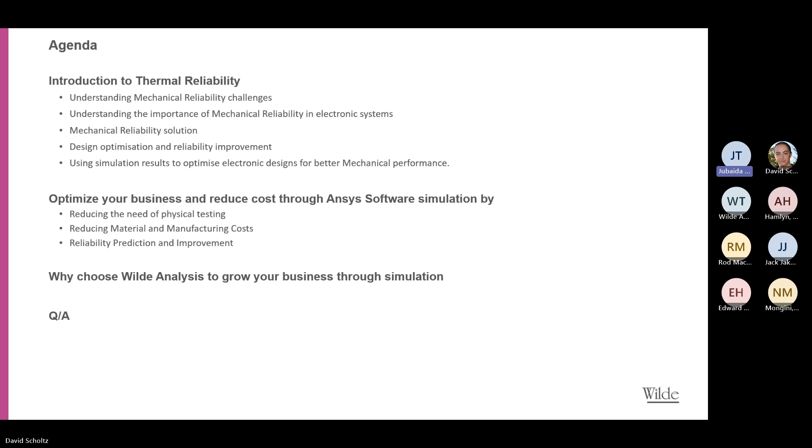So today's agenda for this webinar is to understand how you can improve your mechanical reliability, understanding your reliability challenges, mechanical reliability in your electronic system, how you can optimize your business by reducing cost through reducing the need of physical testing, reducing material and manufacturing cost, and also how reliability can predict and improve your product lifecycle.

Electronic systems are found in nearly all industries, everything from aerospace, automotive to consumer electronics and healthcare. To ensure these systems remain operational and perform their intended functions in a variety of environments is critical to product success and customer satisfaction. Companies who properly address electronic reliability concerns through simulation can meet many of the objectives stated here.

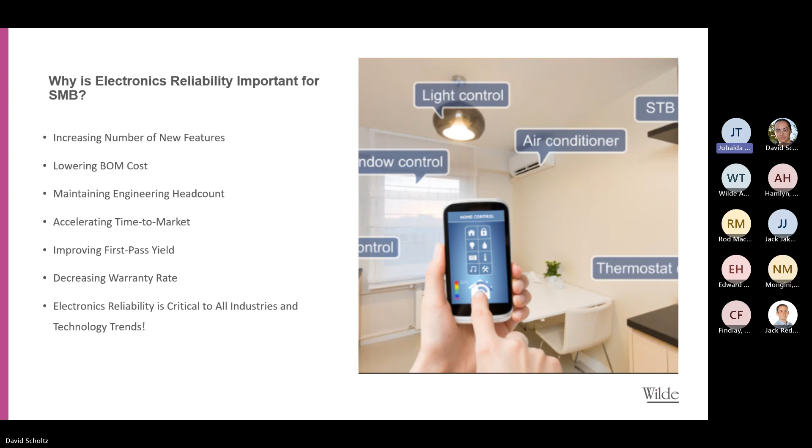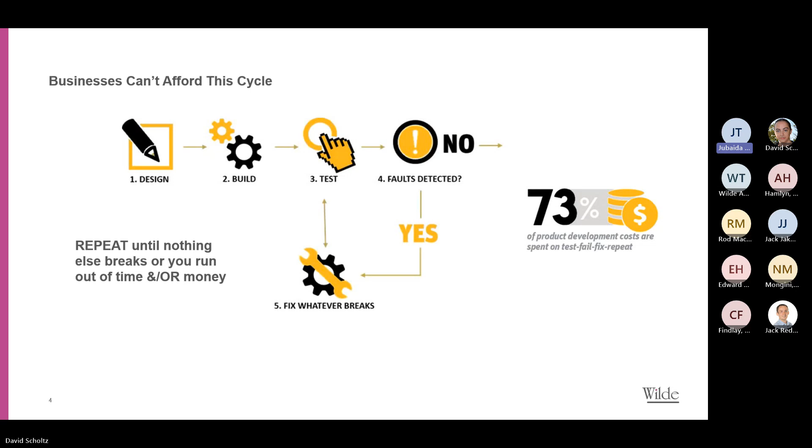Traditionally, companies have used a design, build, test, then break and fix approach in the design cycle. This process can be very expensive and time consuming. The design rules and best practices associated with this process may not provide engineers with enough guidance to properly design modern cutting edge products.

By using simulation, virtual prototypes can be created, tested virtually, and provide engineers with a higher degree of confidence that the eventual physical testing they do run will be successful.

Performance, safety, and cost are critical considerations in the design of electronic systems. Designs are required to reliably perform their intended functions in a wide variety of demanding environments. If an electronic system gets too hot or has any mechanical failure, it may not be able to perform its intended functions, and in some cases, such as automotive, aerospace, and healthcare, this could put people's lives at risk.

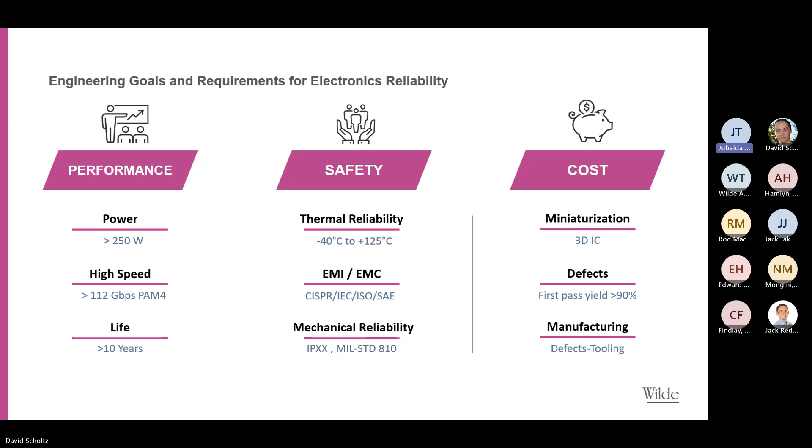Many existing customers of Ansys benefit from reduced design, development, and material cost, reduced product development timeline, and improved project performance and reliability by moving from physical testing to virtual product testing.

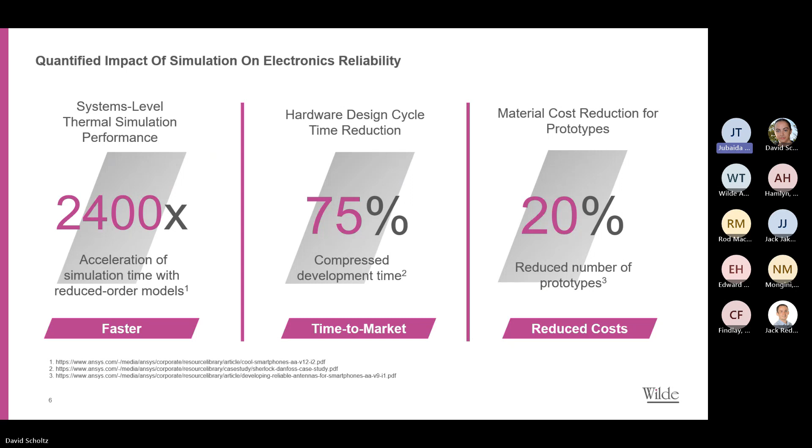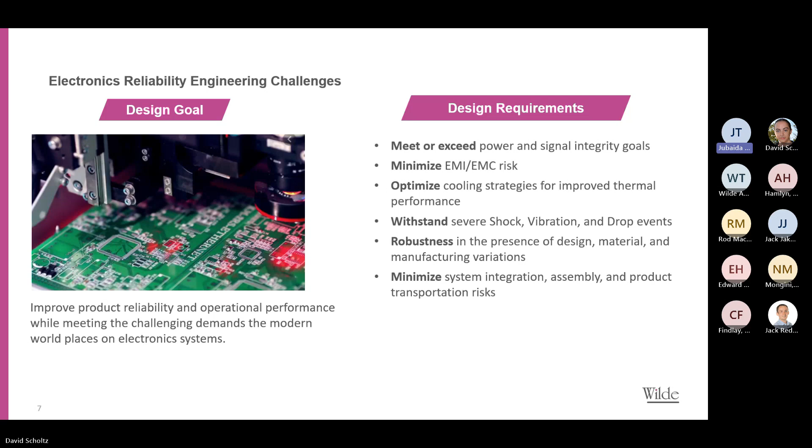Engineers must address a wide variety of design requirements when designing electronic systems. This ranges from electrical, such as signal and power integrity, thermal, such as implementation of optimal cooling strategies, or mechanical consideration, including ability to withstand thermal cycling, shock, vibration, and drop.

Additionally, products are required to meet life requirements to make sure they perform their intended functions for at least some specified amount of time. Engineers are also required to consider the effect of manufacturing, transportation, and product operation as part of their design process. Ansys provides a range of tools and workflow solutions that address a wide range of electronic reliability concerns.

Its simulation toolset plays a key role in understanding how electronic systems operate and perform in a variety of applications. Over the next couple of weeks, we are going to focus on each of these areas in a separate short webinar. Our first webinar was on electrical reliability, where we discussed electrical simulation to address concerns related to signal and power integrity, EMI and EMC.

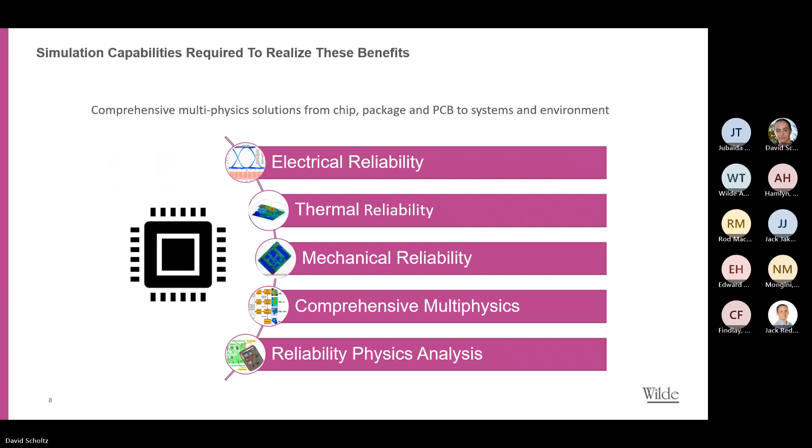Our second webinar was conducted on thermal reliability in electronic systems, where we addressed and demonstrated how to maintain thermal integrity using Ansys Icepak. Today, we're going to focus on mechanical reliability.

Mechanical reliability - mechanical parts, being the physical structure of PCB and other electronic components, are susceptible to failure due to excessive rapid shock, vibration, drop, and other environmental factors. Structural integrity is required to be maintained to help ensure electronic devices perform their intended functions.

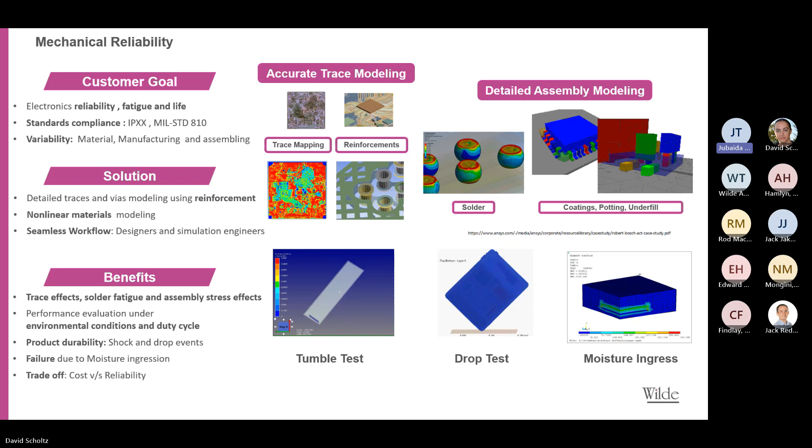Ansys has a wide variety of solutions to quickly prepare high fidelity simulation models that can be used to assess the mechanical performance of electronic systems. I'm now going to hand this presentation over to my colleague, David Scholtz, who's going to go through some of the technical aspects of mechanical reliability and how Ansys can assist your organization to optimize your product lifecycle. So over to you now, David.

Thanks, Jubaida. So when we're assessing for mechanical reliability, there are a wide variety of complexities that we need to address and consider. Broadly speaking, we can sort these into three categories: geometric complexities, material complexities, and physics complexities. The first of those, geometric complexity, mainly relates to the broad scales that we're looking at here.

So we're talking about the relatively large scale of the PCB itself, or the housing in which it sits, through to the small components on that PCB, and further still to the small scales of the thickness of the individual layers of the board.

In terms of materials, as you might imagine, when we have a large list of materials involved in any particular analysis, that already is a complexity in itself, even when we're working with linear elastic material behavior.

When we start including more complex behaviors such as plasticity or creep or temperature dependence of those behaviors, that further increases the complexity vastly. This is particularly evident when we need to complete analysis and assessments for fracture and fatigue cases, where small details and dependencies have a big effect on the result of the analysis.

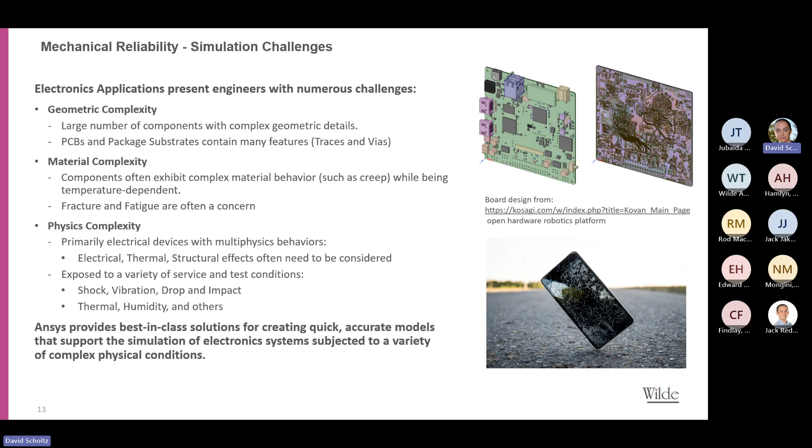So looking at the way we model these PCBs, we also have a range of approaches available within the Ansys package. Now these range from the more simple, quick and easy approaches through to the far more detailed assessments where we can look at small features in great detail.

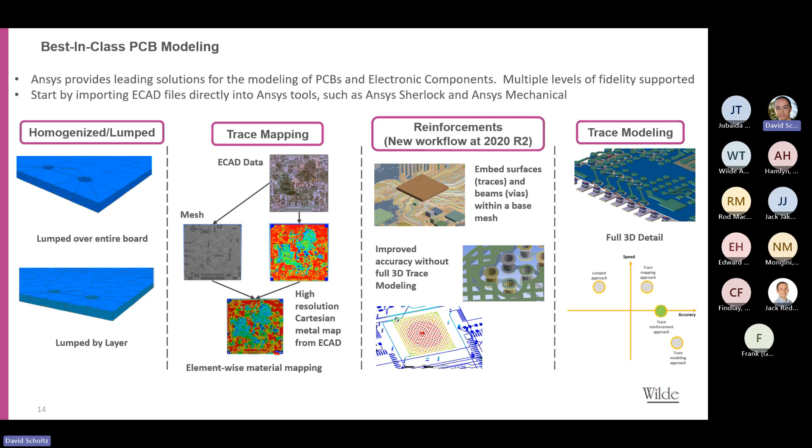So let's think a little bit about the component modeling, looking at the individual components on the board. Now, the main challenge here is that we're relying on a detailed modeling of the leads and the solder and other small features.

And we have two ways we can go about solving this. So the solutions provided are broadly covered by either Ansys Sherlock or Ansys SpaceClaim. And these are two very different approaches to the same problem, this complexity problem. Now, Ansys Sherlock approaches this in a spreadsheet type fashion, where we have a vast database of parts and components that's ever growing in size, that then allows us to effectively treat the individual components as a black box, if you like, a background representation rather than including the explicit geometry each time. And this allows us then to assess reliability in a quick and optimized fashion without needing to repeat the analysis every time we use the same component.

SpaceClaim takes a slightly different approach here. So when we're using the SpaceClaim approach, what we're talking about here is defeaturing. So what we can do is we can take the full detailed geometry, and in SpaceClaim, we can remove the features that are not consequential to the current type of analysis. So this is where it differs from one analysis to the next. But what we can do then is we can simplify the geometry, thereby simplifying the mesh. And in that way, we can increase the effectiveness of the analysis by reducing the timescales required for the solution.

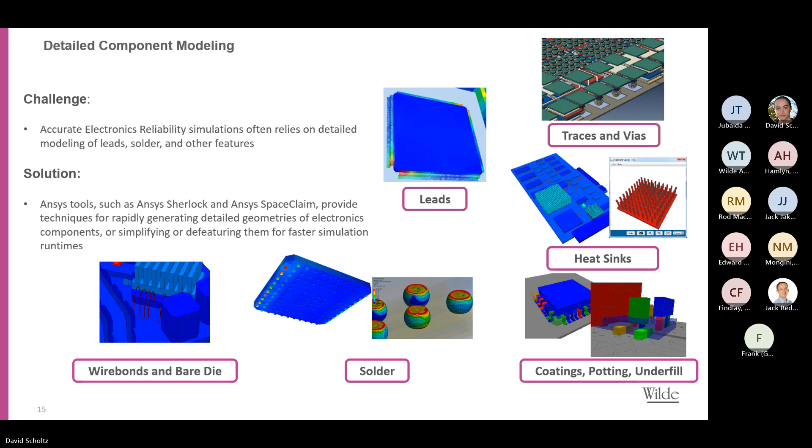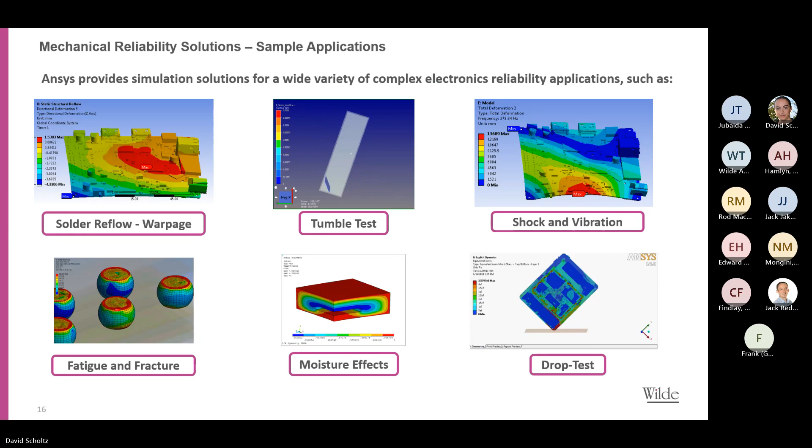So let's come back to the solder reflow. In modern lead-free PCBs, we need to apply this reflow process. The trouble here is that the melting temperature of this lead-free solder can be in excess of 170 degrees Celsius.

When we're looking at this range from room temperature up to and in excess of 170 degrees, we have a lot of effects relating to the thermal expansion coefficients of the different components. As you might imagine, with different materials, we have different expansion coefficients. And so this mismatch in the thermal expansion coefficients can result in significant stresses and deformations within the part.

So we can assess for this. The solution here is provided through the thermomechanical analysis within the Ansys package, and we can complete this for any components as long as we have the material data available.

In this way, we can provide an accurate prediction of the package and the board warpage due to these thermal loads. And this can then allow us to assess the stresses and identify and avoid premature failures due to the reflow process.

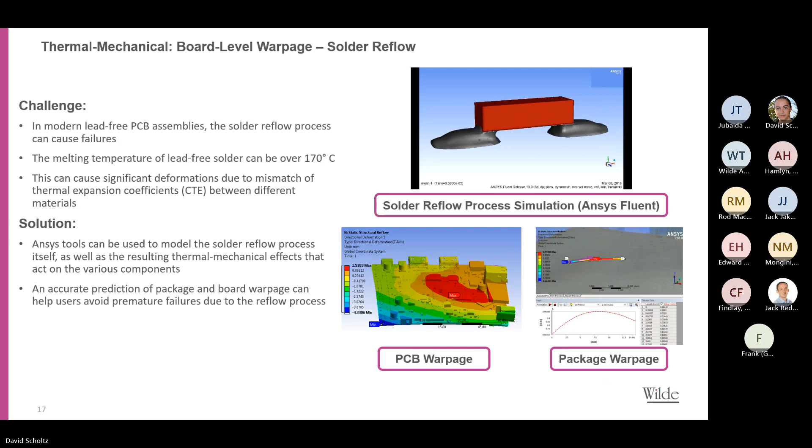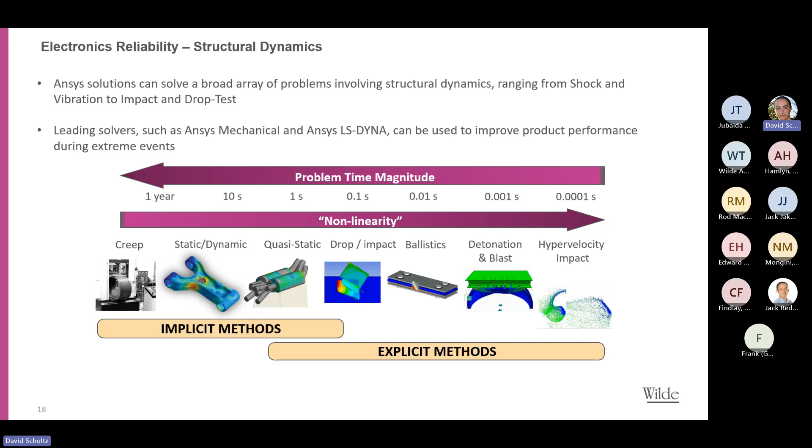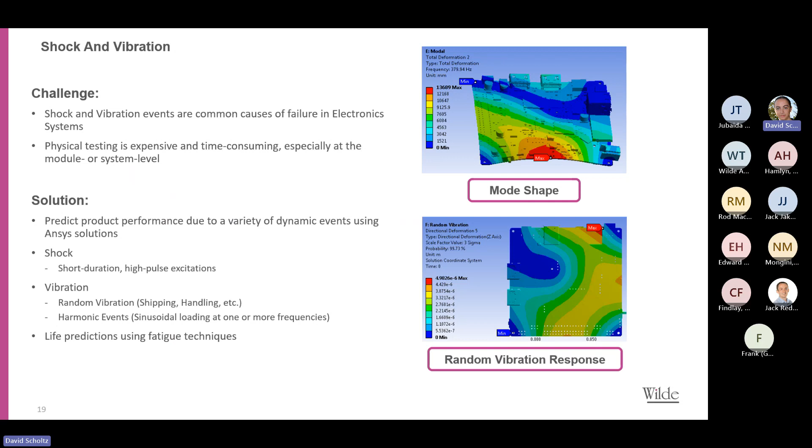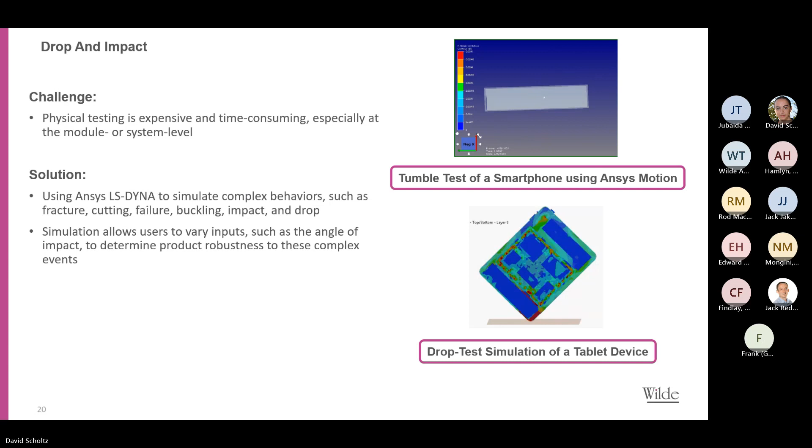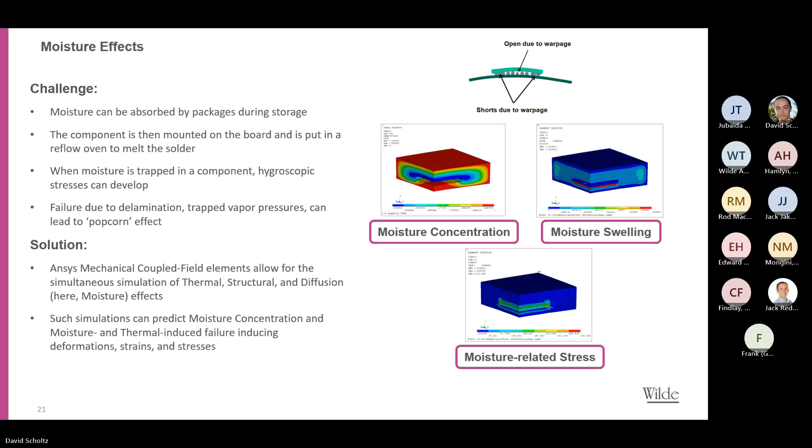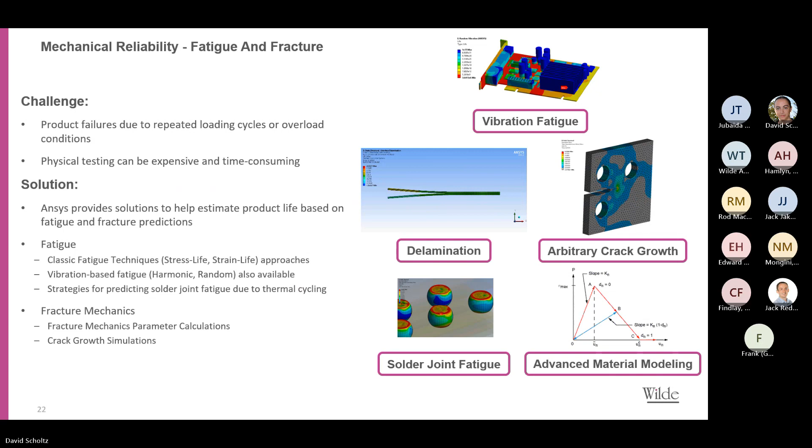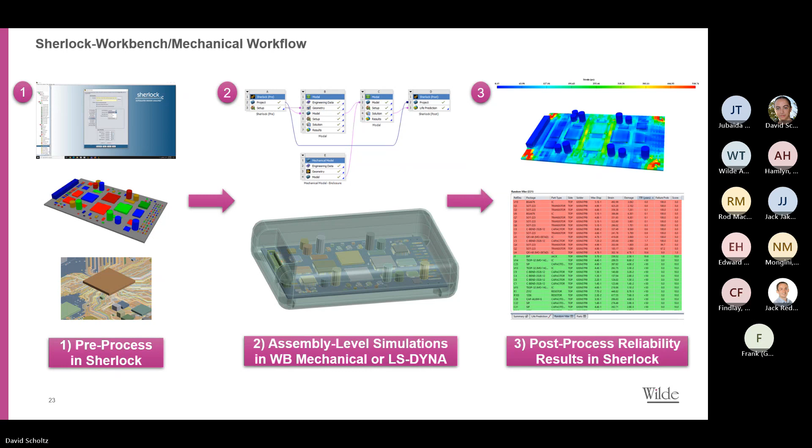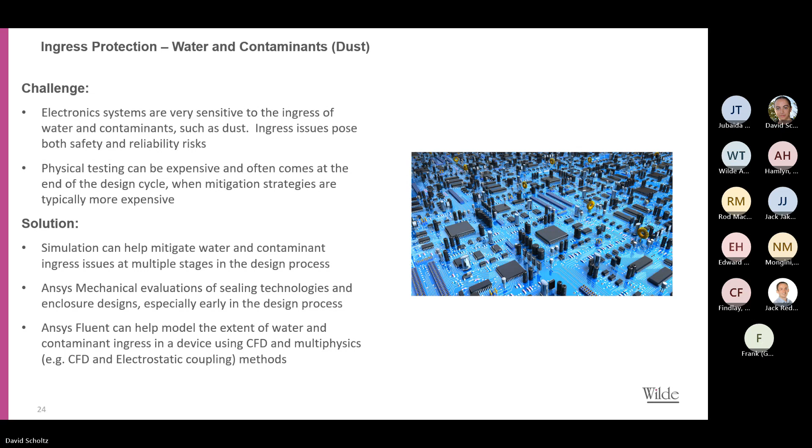Looking now at a specific application for flexible PCBs.

We have this example where we have a PCB substrate and the copper traces thereon, and these need to be considered, or rather the loads, stresses and deformations need to be considered through both the installation and usage of this product. We can separate out the PCB and assess these deformations or stresses within the PCB, as well as assessing these individually within the copper traces separate from the board.

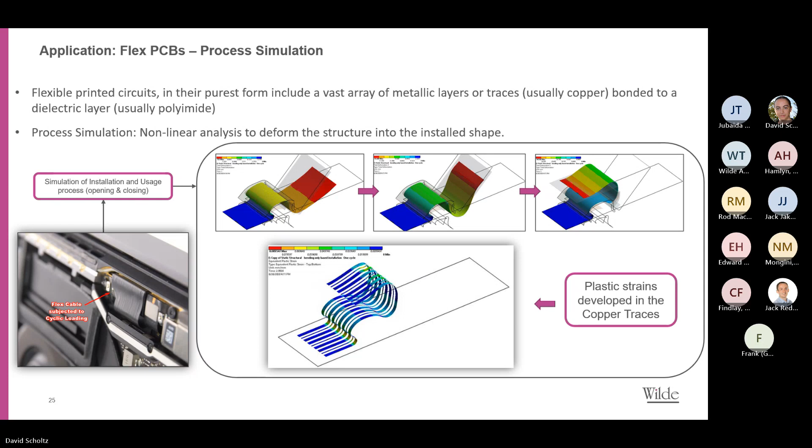We can also create animations to help with the assessment and understanding of the results. We can see here how we're having to bend and deform the PCB, and we can then see the stresses developing throughout this process, helping us to assess which part of the process generates which stresses.

Similarly, we can look at the plastic strains developed in the traces in the same way. This effectively gives us a time history, or a loading history, of those developed strains.

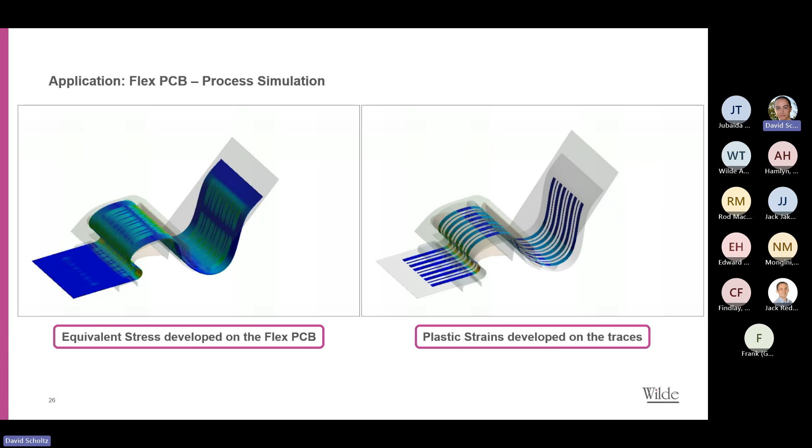Now, these are large deformations within the structure - we're bending it quite aggressively. As our more experienced users might be aware, users of any CAD or analysis software, when we start bending things to large degrees, we're deforming the mesh. And a deformed mesh can lead to solver failures or inaccurate results.

So we have a solution for this as well - in fact, we have two. These are morphing strategies, ways that we can morph the mesh so that it still represents the geometry without having these highly skewed and distorted mesh elements in the mesh itself.

The first is a 3D CAD-to-CAD approach, where we're linked to the original CAD, and then we can remesh through the process if necessary. Another is effectively a simplified approach, using an auxiliary 2D representation, a guide curve if you like, to influence and inform this morphing of the mesh.

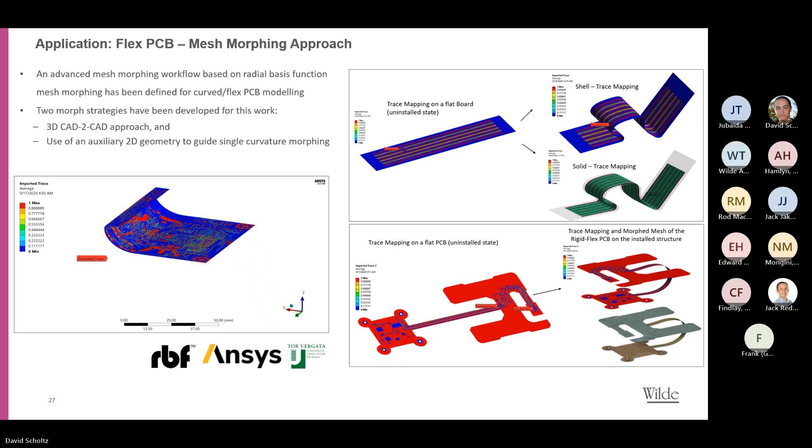So the features we've covered here relate to mechanical reliability as applied to electronics. Through the power of simulation and the Ansys solvers, we can help avoid component and assembly failures due to mechanical shock and vibration, just a few examples of a wide variety of applications. We can do this through assessing for issues such as delamination, component cracking, and the popcorn effect when looking at the solder reflow process.

This is due to the leading preprocessor and solving technologies available as part of the Ansys suite, enabling us to consider complex physics and multi-physics problems, such as drop tests and thermomechanical applications.

Through the application of all of this, we can reduce the costs associated with physical testing. We can reduce the timescales, and we can therefore increase innovation and optimization before getting to market, all without increasing the runtime - in fact, decreasing the time to market.